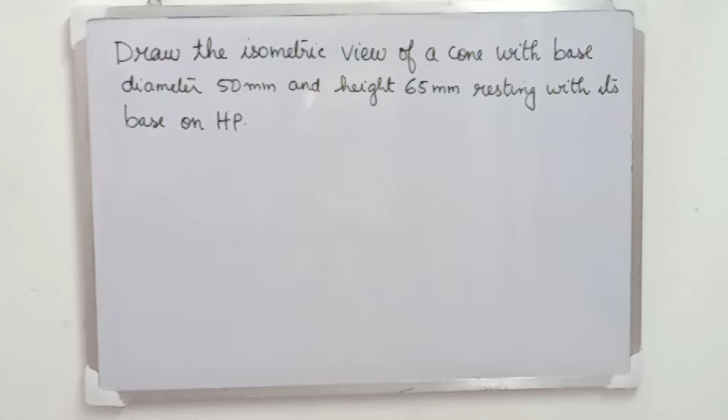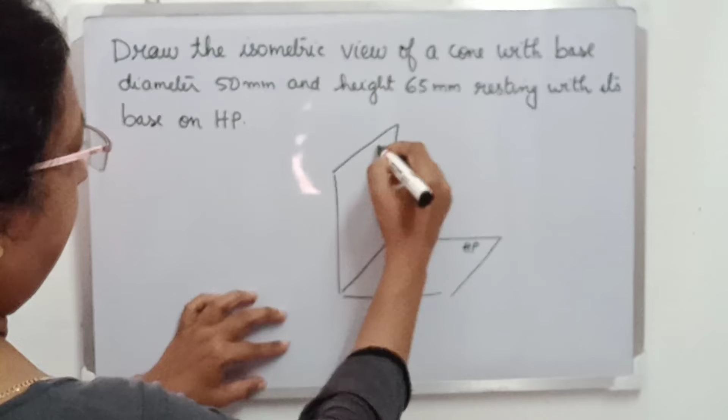In this video, let's see how to draw the isometric view of a cone. Let me read out the question first. Draw the isometric view of a cone with base diameter 50 mm and height 65 mm resting with its base on HP. So I am drawing the reference planes HP and VP and drawing the pictorial view of this cone.

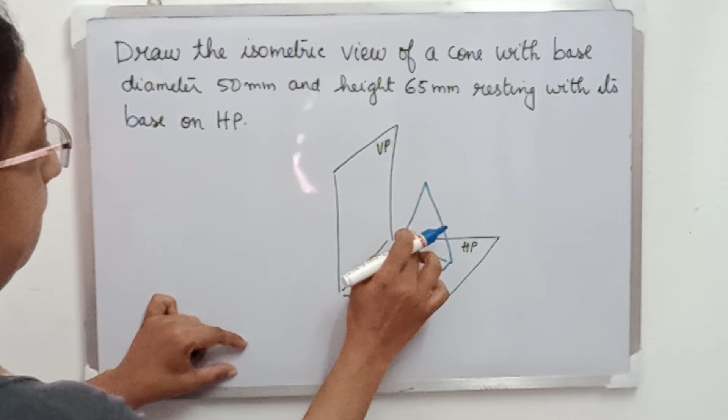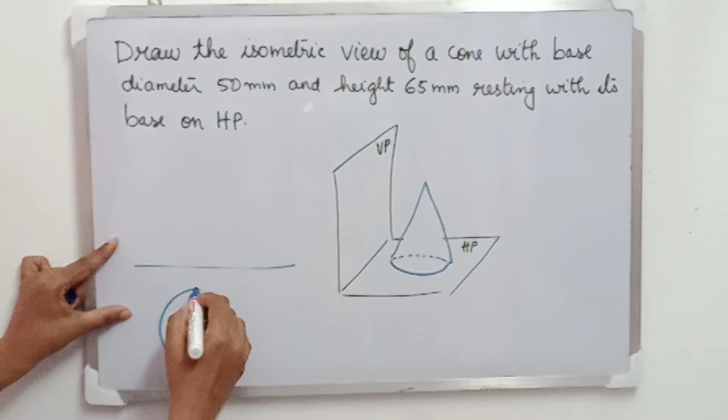The cone is resting with its base on HP. So the base I'm drawing now. Drawing the generators to the apex and completing the cone that shows the base. In order to draw the isometric view of this cone, first we need to draw the orthographic projection of this one. That is the top view, which is a circle, and front view, which is a triangle.

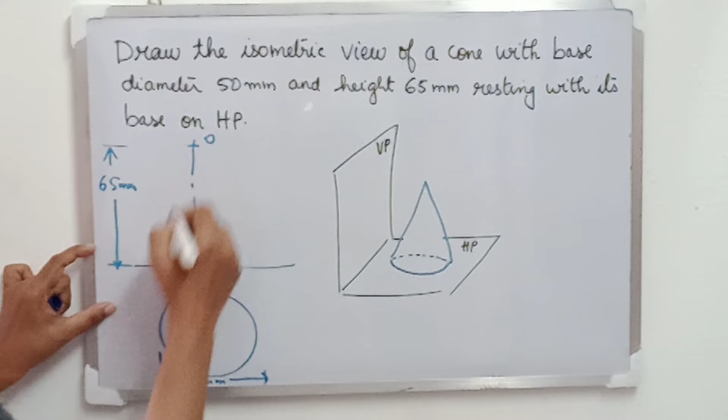Dimensioning is important, so mark the diameter 50 mm of the base circle, and that is a center point. From the center point, you need to draw a vertical line, chain lines, that is axis, and mark apex at a distance 65 mm from the XY line. Let us mark it as O. Next, to draw the front view, I'm drawing projectors from important points of the circle and then joining these points with the apex, we get a triangle, which is the front view of this cone.

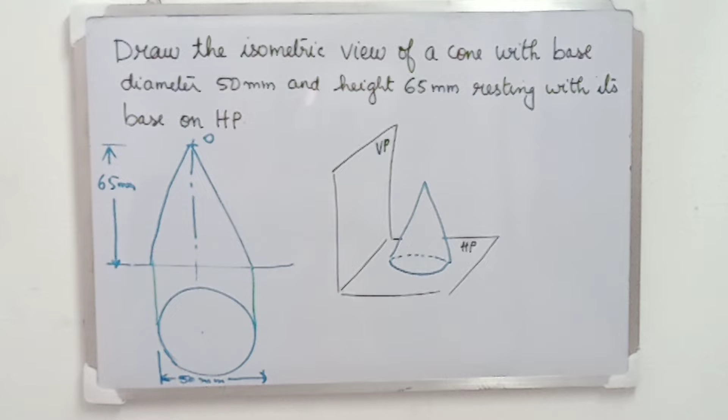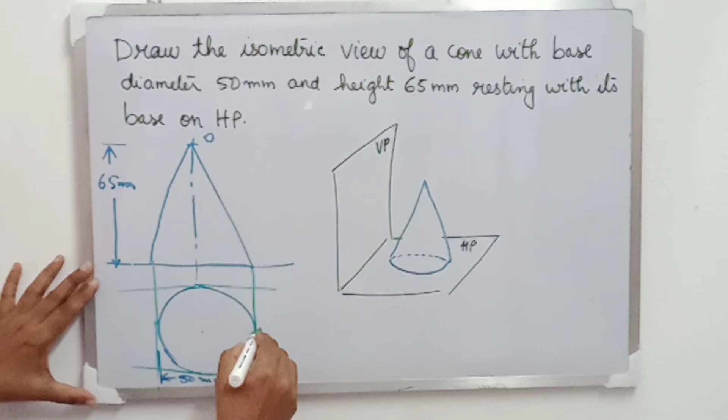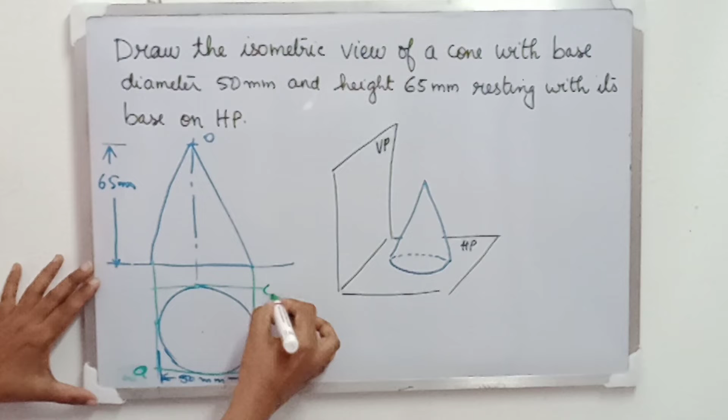In order to draw the isometric view, let us enclose the top view, that is a circle, in a square. Okay, and I'm naming the square as abcd. I'm using small letters because it is the top view. Small letters a, b, c, d. Next, let's start to draw the isometric view of this cone. So first we need to draw this base square.

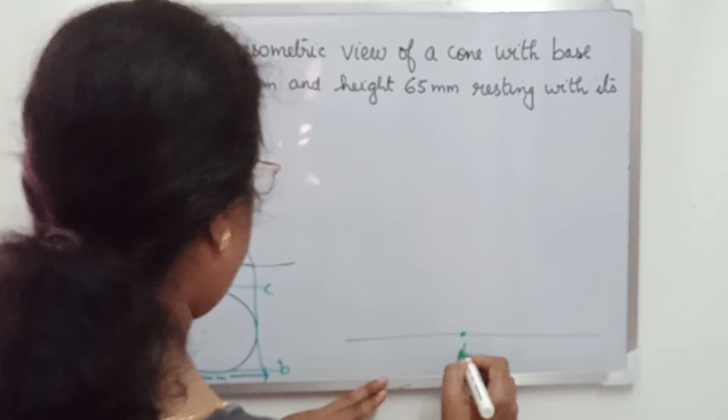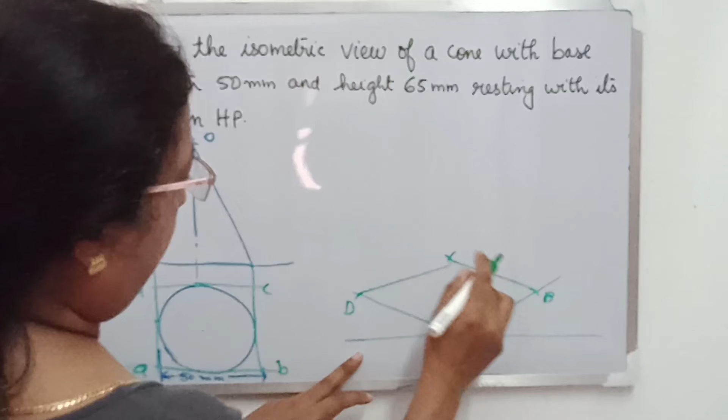So horizontal line, pivoting at point A, drawing two lines at 30 degrees towards left and right, and marking B on one and D on the other line, and also taking the distances BC, drawing an arc, and DC, drawing another arc to cut it to get the point C, and completing the rhombus for drawing the base circle.

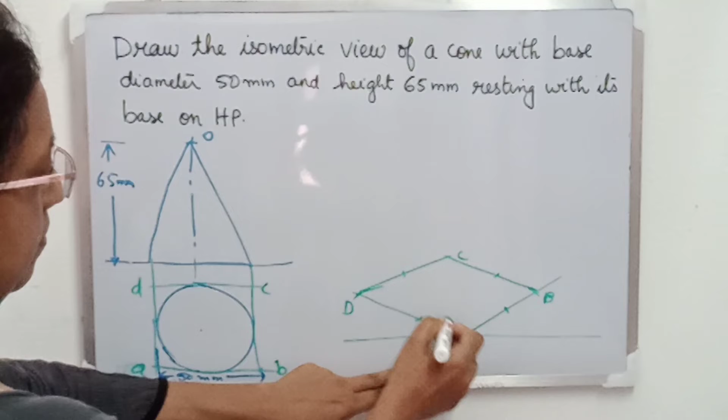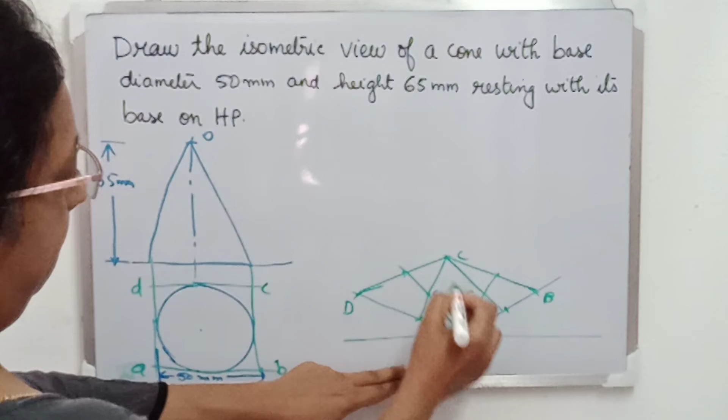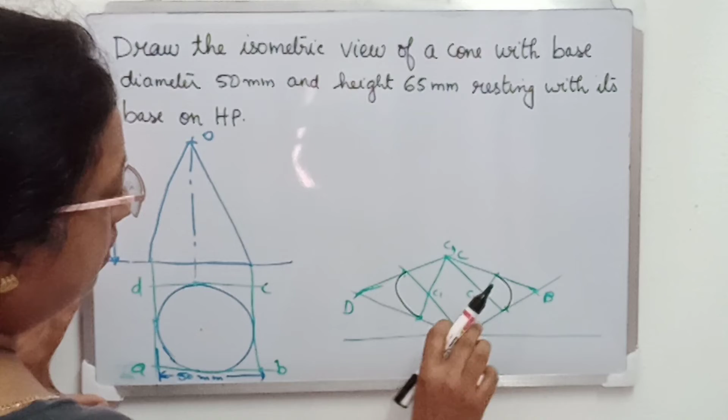To draw the isometric of the base circle, let us use the 4 center method. For that, marking midpoints of 4 sides, then joining corners A and C to these midpoints of opposite sides and locating C1, C2, C3 and C4. Next, with C1 as center and this much as radius, draw an arc using compass. Then C2 as center and that as radius, draw an arc using a compass. Then C3 as center and this as radius, draw an arc. C4 as center and this as radius, draw another arc. Our base circle isometric view is complete now.

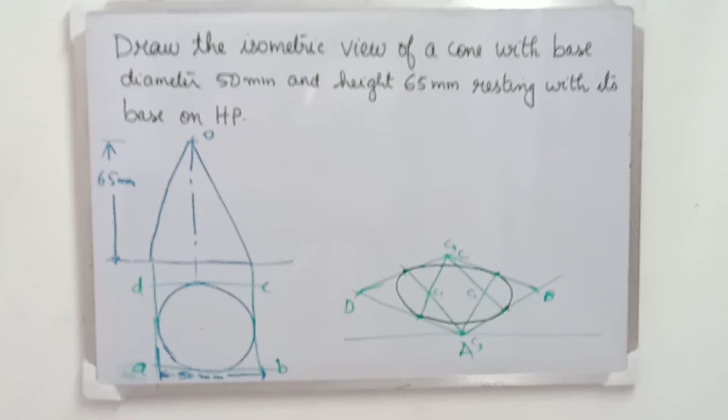Now that the isometric view of base circle is complete, we need to mark apex on the isometric view. Apex O lies on the axis which joins the center of the base and the apex. So let us mark center of base as P. Now we need to transfer this P onto the isometric view. For that, drawing lines from P to ab and bc. Let us name it as e and f.

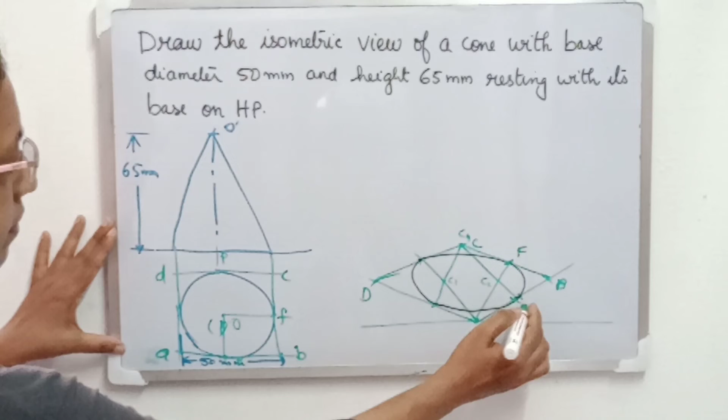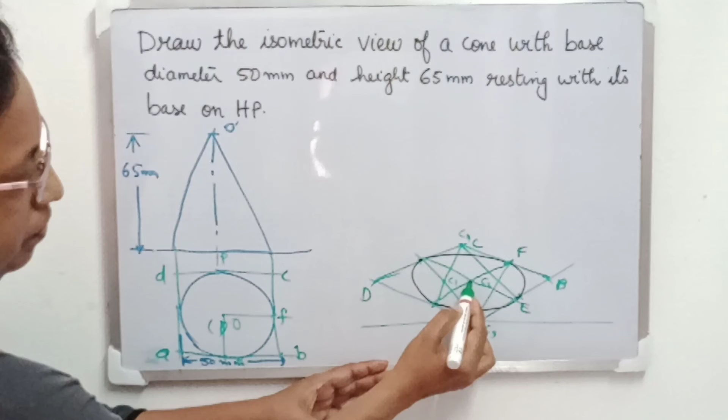Now let us transfer the points e and f to the isometric square. So taking the length ae and marking E, and bf and marking F. E and F should be capitals as it is in the isometric view. Now from F, draw a line parallel to the isometric lines, and also from E, draw a line parallel to these isometric lines. This will meet at a point, and that point will be P, that is the center of the base circle. Now from P, we need to draw a vertical line of length 65 mm and mark O, the apex on it.

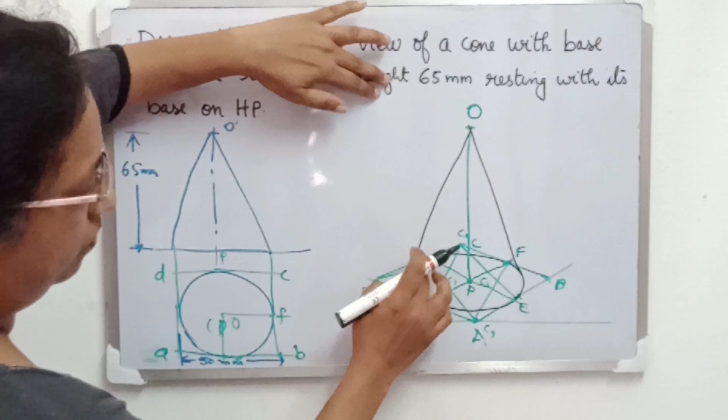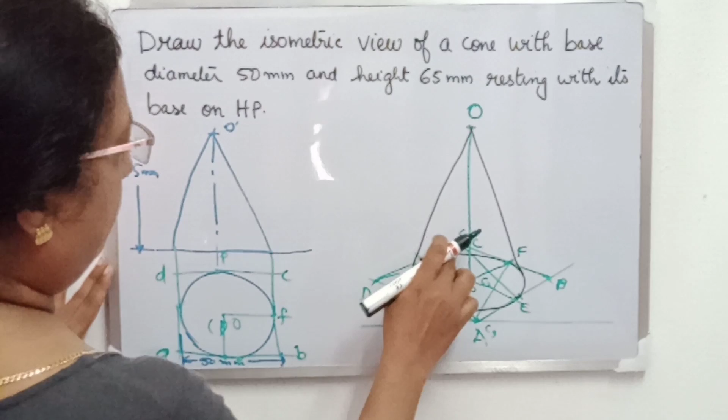Next, to complete the cone, we need to draw 2 generators. So select the outermost point of the base circle and draw tangent to it to meet at point O. So on both sides, I have drawn 2 tangents and they meet at O. Now the isometric view of the cone is complete. One curve will be hidden, so I am indicating it with a dashed curve.